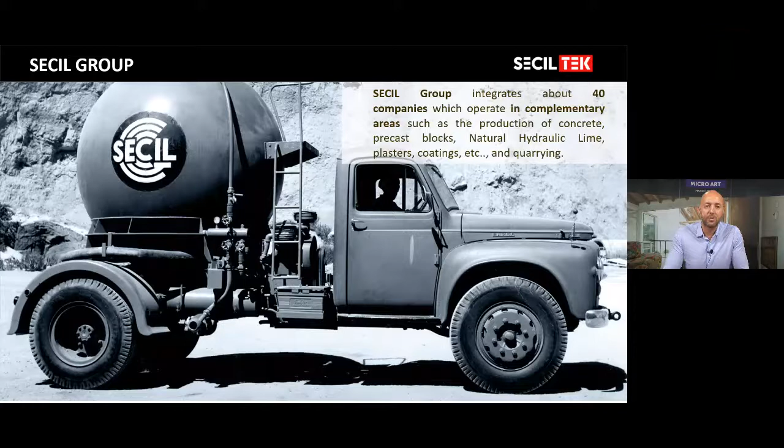Okay, very well. So proceeding, just a quick introduction in terms of the SECIL Group, which is the group where SECILTEK belongs. SECIL Group is a leading group in Portugal for cement production that was founded in 1930. The group also integrates around 40 companies which operate in different complementary areas, such as concrete precast blocks production, natural hydraulic lime, mortars, coatings, all sorts of mortars, and of course also the exploration of quarries, so the quarrying.

Internationally, the SECIL Group is present in several countries with production of cement, mainly Tunisia, Lebanon, Brazil, and Angola. And as I told you, one of the companies within the group is SECILTEK.

SECILTEK is a company that will achieve 130 years next year. It was founded in 1891, mainly with the production of lime and now natural hydraulic lime, but also due to the investigation and development and investment along the years, we have introduced a full range of products that go from tile adhesives to waterproofing, renders, concrete, premixed concrete, micro cement, screeds, rehabilitation mortars, etc. So it's a wide, complete range that can be consulted through our website, seciltek.com.

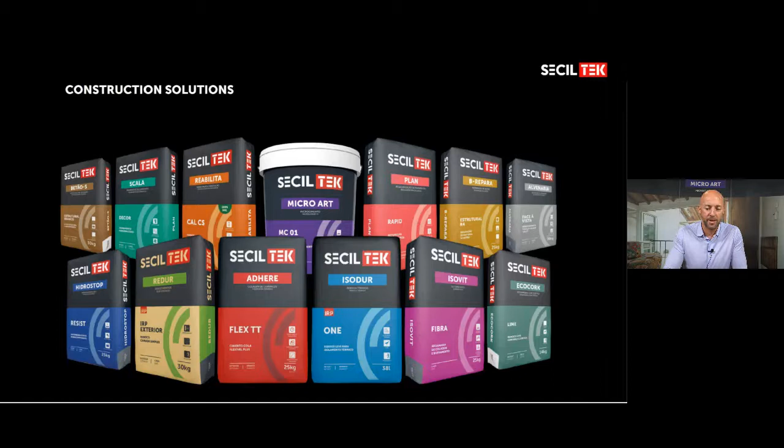As I told you, we are one of the oldest and few companies worldwide still producing natural hydraulic lime, which is a premium binder for rehabilitation mortars and also for new sustainable construction, together with some of our systems based on thermal insulation.

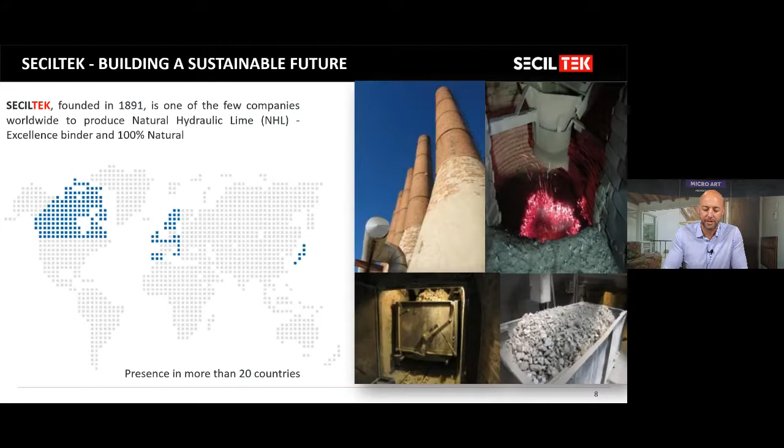Okay, so to start on the MICROART subject. MICROART is a decorative microcement coating. It looks a little bit like what's called béton ciré, or pretty close to what's very traditional in terms of Venetian stucco or tadelakt. But in terms of application, performance, durability and resistance, it's quite different because we can use it also in floors, not only in walls.

I will focus my presentation on the main characteristics of the system: what it is, what type of substrates, what products are involved, the field of application, the application method, which is very important and the focus of this presentation, and some references. In the end, to consolidate all the knowledge, we will have a step-by-step application video that we will try to make available at the end of this presentation. I think it will work very well to consolidate the knowledge I will try to transmit today.

So in terms of general characteristics, what is the MICROART system, what is the microcement? It's mainly defined by a thin layer. It's a decorative coating based on a thin layer that can be applied on walls and floors for pedestrian traffic, okay? We are talking about areas with only pedestrian traffic. Usually the total thickness of application is between 3 to 5 millimeters, which makes this system very good for renovation and rehabilitation purposes. We're not increasing a lot of thickness in the walls or floors when you want to renovate an old coating. It's a continuous coating, without any joints, which is also very well seen aesthetically. So, ideal for renovation due to the low thickness and ease of application on a wide variety of substrates.

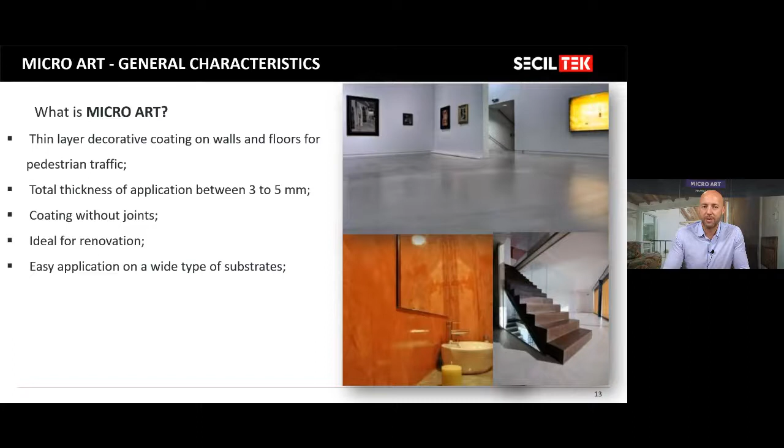Due to the characteristics of the Microcimento or MICROART mortars, we can apply it to almost all types of substrates, even substrates without any absorption or porosity, which is very interesting. It's also available in different colors and different finishes, which I will show you later.

Applied by specialized teams. As I like to say, a good solution, a good system, is only a good system if it's well applied. It can immediately turn into a bad or low performance system if not applied according to the rules or by certified, specialized teams. That's why we are here, to share our knowledge and give useful information to companies or people who will install this system.

It's a system composed of several products with high profitability and durability. It's important to know them all, how to apply them, and if everything is done well, we're looking at a very durable solution with interesting profitability for the people who apply it. Starting from the beginning, we have the MICROART AD21, which is a product suitable for substrate preparation.

As I told you earlier, MICROART mortars are characterized by high adhesion, so usually you don't need a primer to promote good adhesion. You need a primer to protect the substrate, usually for high porosity or heterogeneous substrates, where you have bits and pieces of paint, residual paint, or different types of substrate in connection. Ideally you would regulate the absorption of the substrate to promote an even drying process for the MICROART mortars. So this is the AD21.

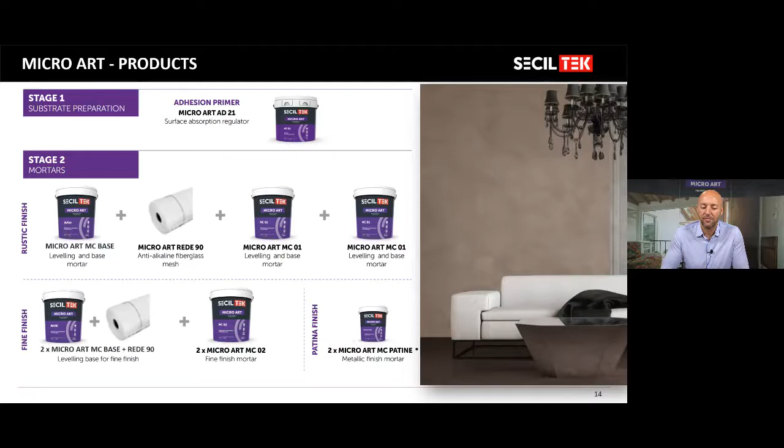After the application of the MC02, if by any chance you're going for a metallic look, we now have a patine finish which can simulate gold, silver, or bronze, called the MicroArt MC Patine. We will have a video at the end showing the application of this new finish that we now have available.

In terms of stage 3, which is the surface protection, this will be the product or system that influences the durability and performance of the system. For example, when thinking about kitchens, or wet areas like toilets and bathrooms, this is very important to focus on. So we have several types of surface protection.

We have acrylic varnishes, composed of an acrylic sealant, with the possibility of going for a satin or glossy look, which is the AD45 or AD46. Or for more demanding areas, for example like kitchens or bathrooms, we have a polyurethane varnish.

This will be a varnish that will seal completely the surface and will promote some increased resistance to water absorption. Here we also need a polyurethane sealant, like a primer, and then MicroArt AD50, which is a 2-component polyurethane varnish.

In terms of maintenance, we have an acrylic wax. This wax is a traditional wax that you would use for a traditional floor, for wood floor, or for a ceramic floor, traditional floor, that can be used to maintain the MicroArt system. We will show how to apply it, but it's very easy to apply. It's like a maintenance procedure that you usually do when using the acrylic varnishes.

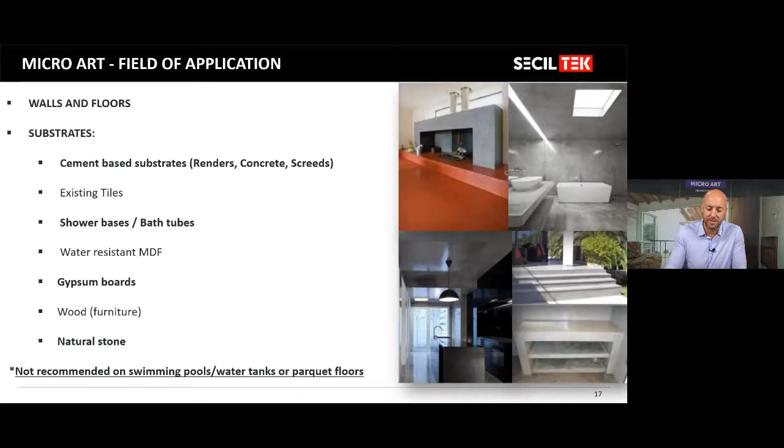We do not recommend the use of the MicroArt system on swimming pools, water tanks, or even parquet floors. Of course, there are some people that would like to have a micro cement swimming pool. We would say, okay, it's usually at the responsibility of the person. When we say we don't recommend it, it's because our concerns are the durability of the system. In constant contact with water, there could be some issues in terms of performance of the system itself. So we don't really recommend it.

In terms of the necessary equipment, for the MicroArt system, it's important to have the right equipment in order to promote good application between layers, but also to prevent pathologies in the future, like protection equipment for foot, to walk on top of the MicroArt system, equipment to clean and vacuum between layers, and also all the tools necessary to protect and promote a good application.

For example, the trowels, the electric mixers, iron sandpapers, we will talk about the grain size, vacuum cleaners, the paint rolls, which are usually short-haired paint rolls, gloves and dust mask for your protection. As application procedures, also the uniforms and clean shoes like slippers, and the tapes for protecting the windows, connection with windows, and plastic sheets.

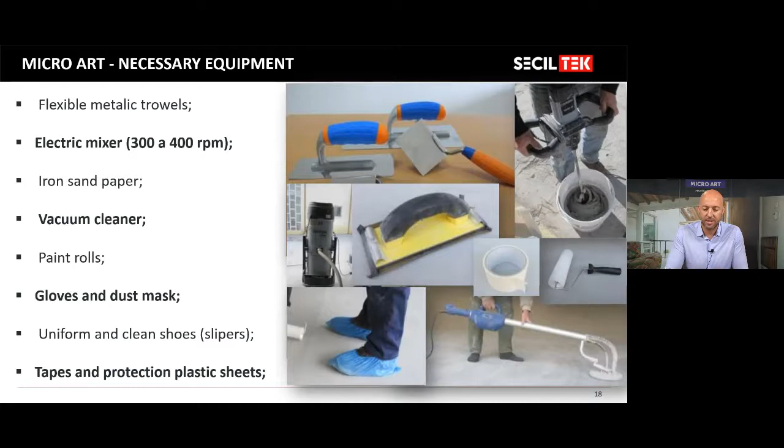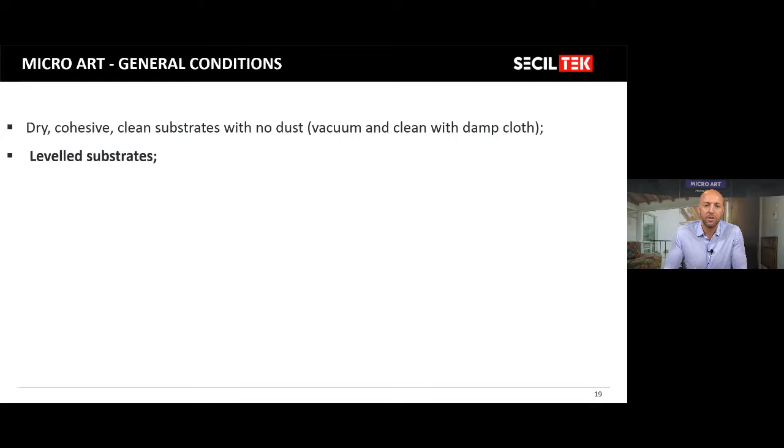MicroArt by definition is a very thin layer system. So if the substrate is not level, you will either consume a lot of mortar or you will notice those unevenness on the substrate. As I told you, the MicroArt thickness is between 3 to 5 millimeters.

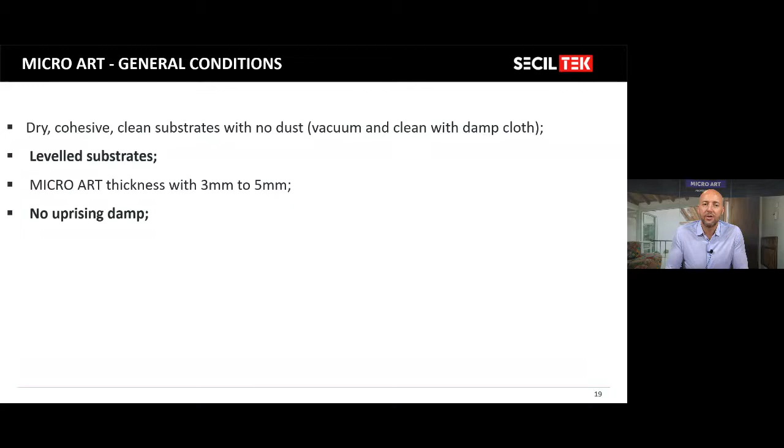It's important that there shouldn't be any rising damp issues. So if it's a ground floor, you should implement solutions and systems that will prevent rising damp from getting trapped between the MicroArt and the varnish or the polyurethane varnish that you are going to apply. Ideally treat it, let the floor dry completely, promote the drying process with mechanical equipment, for example, and only after that, when you have just a residual moisture content, should you apply the MicroArt system.

In terms of shower bases, by definition, MicroArt is not a waterproofing layer. It's a system that has a good resistance to water absorption, but in terms of shower bases, you should promote a correct waterproofing. For that, you can check our Hidrostop range for the cement-based mortars for wet areas and shower bases.

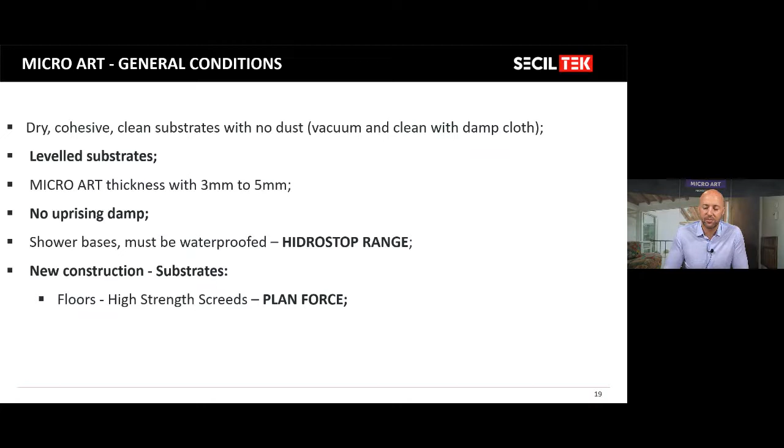In terms of new construction, we recommend substrates that have a good resistance, resistance to pull or adhesion between 1.5 megapascal. In case of floors, we recommend the Plan Force, which is a high-strength screed, or in walls, the use of a high-strength render, ideally Redur Max.

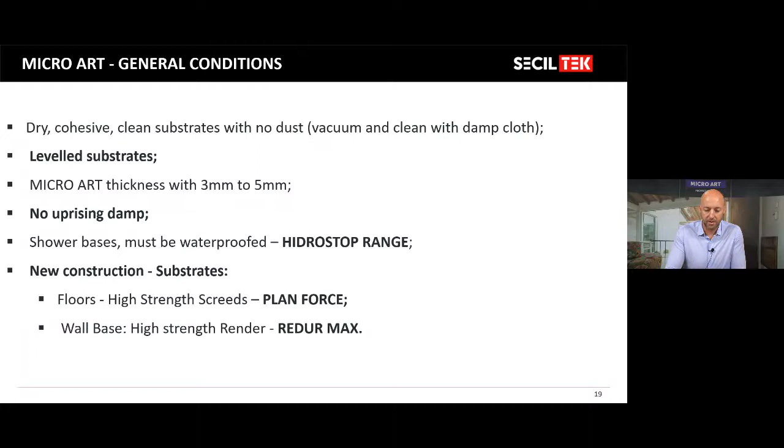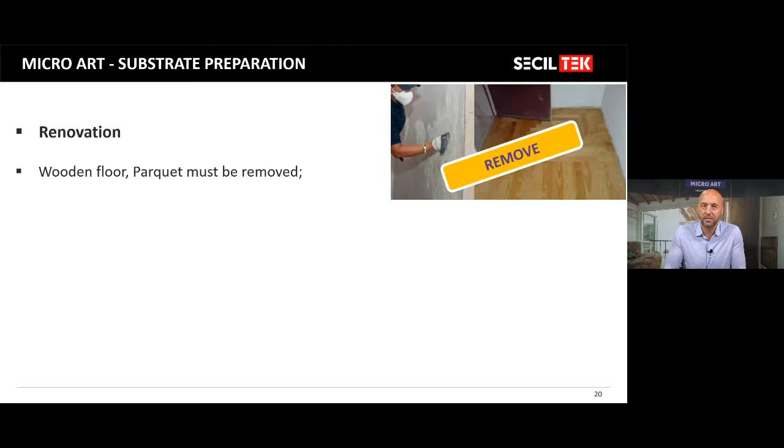In terms of renovation, if by any chance we're looking at wooden floors or parquets, they must be removed. Also, cracked surfaces or non-adhesion particles must be repaired, either with high-strength render, or in case of floors, with a high-strength screed. You should remove existing paints or varnishes.

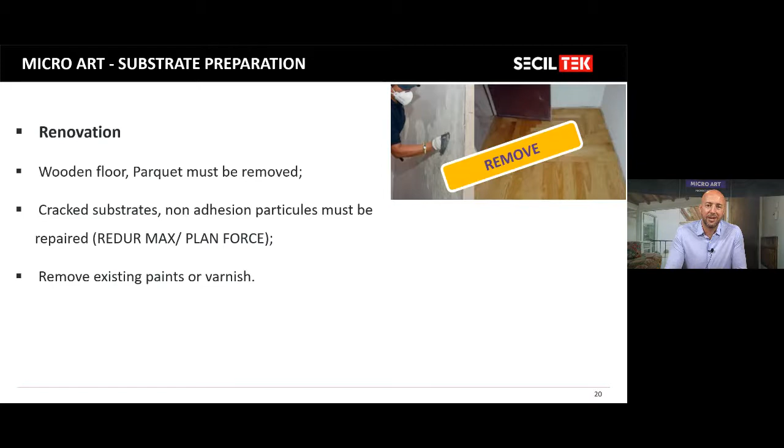If by any chance the existing paint is very well in connection, the adhesion is very, very good and it's difficult to remove, this could be a good substrate for the application. But ideally, any paint that doesn't have good adhesion, you should remove it.

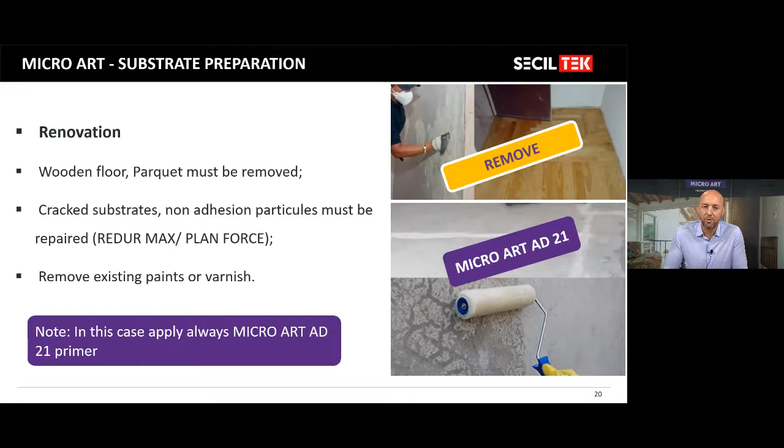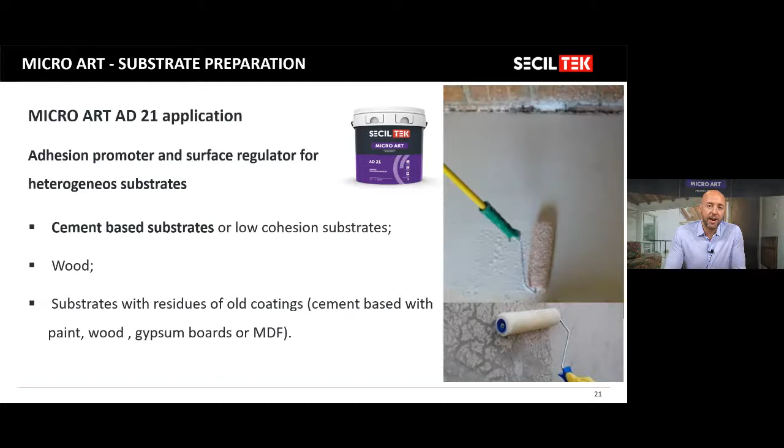In these cases, because we are talking about heterogeneous substrates, you should always apply the MICROART AD21 primer and regulator. This is just an adhesion promoter for cement-based substrates and wood, or substrates with residues of old coatings, so heterogeneous substrates, and substrates that have high porosity. For those types of substrates, AD21 is recommended.

In terms of the application itself, we will see in the end a video that will clarify all the steps, but I give you here a preview of the products in terms of the mortars application.

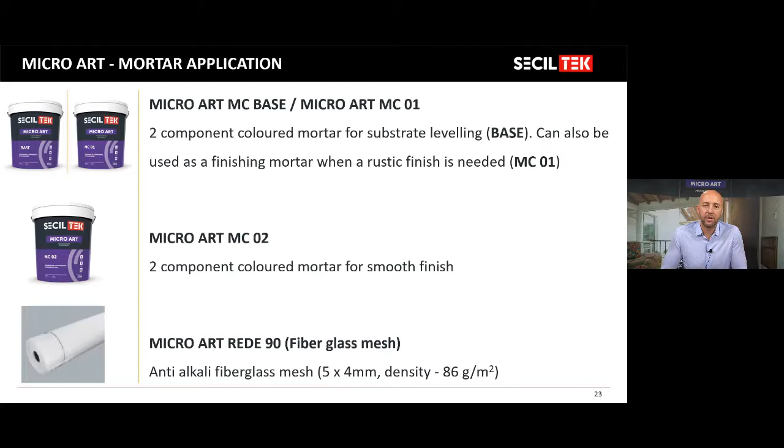We have, as I told you, MC base, which works as a base leveling product for all sorts of finishes. If you're going for a rustic finish, then MC01, which is also leveling mortar and finishing mortar for the rustic finish, or you go for MC02, which is the fine two-component mortar for the smooth finish. The MICROART Mesh 90, always use it when you're applying the system on floors or over tiles.

Another thing I would like to focus on, because this information at this point is probably a lot, but it's present in our brochure, you can study it after. I would focus on the smooth or fine finishing, and I would like to make clear the difference between the coats you have to apply in walls, which is usually one coat of MC01 or MC base, and then two coats of MC02.

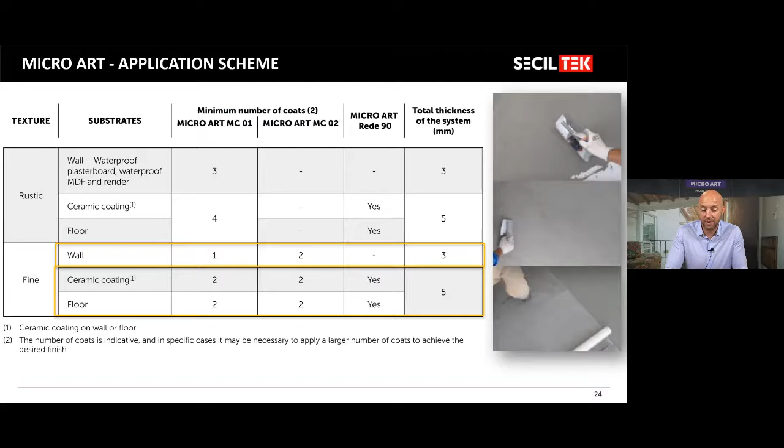This will give you a thickness of around 3 mil. But if you're working on top of ceramic coats, ceramic or tiles, or even in floors, you have 2 coats of MC base, and then 2 more coats of MC02. This will give you the total thickness around 5 mil. Just wanted to focus on these different thicknesses, so you can check what needs to be done in one case and the other.

In terms of the mortar preparation, we will also check it on the video, but the mortars, the MC base, 01 and 02, are 2 components. Component A is a powder, which is white, and then the liquid is the colorant that will give you the color in the end. So you just need to mix very well component B, the liquid, before joining it with component A, and then mixing both with an electric mixer, more or less around 2 minutes, until you obtain a homogeneous paste.

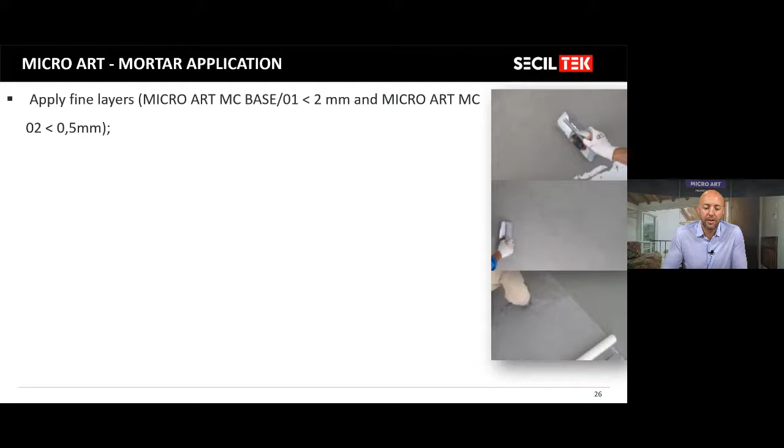We should apply this system always in fine layers, ideally the 01 or base below 2 millimeter thickness, and then the MC02, because it's a finer product, below 0.5 millimeter. In floors or over tiles, we always need the mesh and 2 layers of MC01 or MC base.

We should work every layer as if it were the last. This is very important to obtain a perfect system. So what does this mean? This means that you have to sand between layers, then vacuum and clean very well before you apply the second layer. And then the waiting period, which is around 3 hours between layers in terms of application.

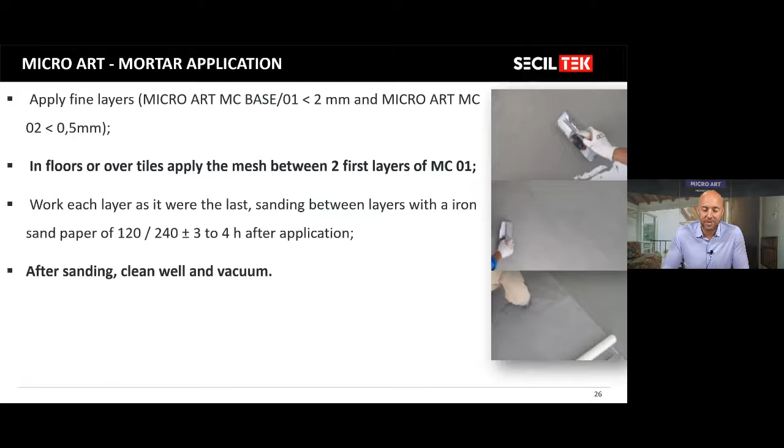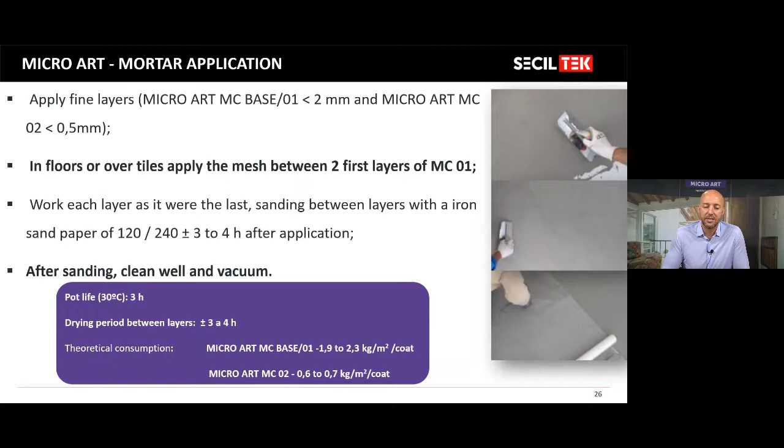After sanding, as I told you, clean the surface very well, ideally vacuum it and then wipe it. Also very important is the pot life of the product: at 30 degrees centigrade, it's around 3 hours. And the drying period between layers, as I told you, is 3 hours more or less. Also the theoretical consumption is here, but you can check it on our brochure.

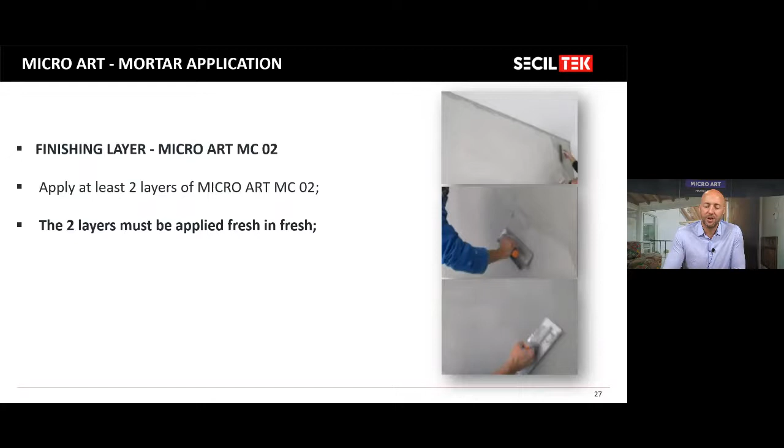In terms of the finishing layer, the MC02, the fine one, whether we're talking about floors or walls, we recommend the application of at least 2 layers. These layers must be applied fresh in fresh. Why? Because this is a very thin layer, we don't have many concerns in terms of the drying process. So the drying process happens very fast. These are very thin layers, so you can apply fresh on fresh, these 2 layers.

It's very important, and here we talked about the protection equipment.

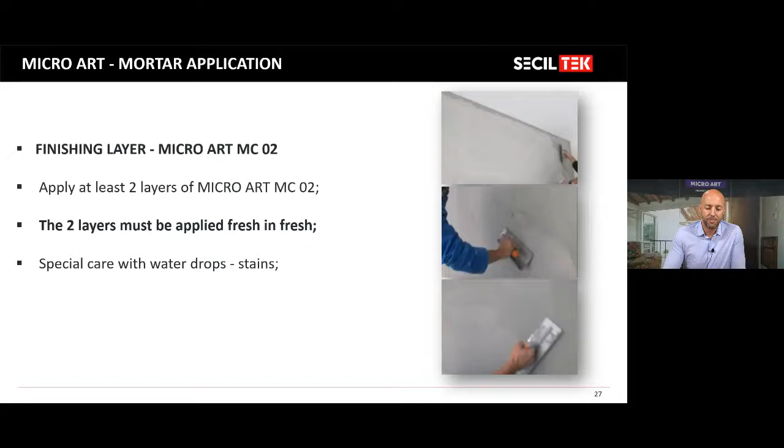In order to prevent stains, which can happen during application due to sweat stains or water drops, it's very important to be careful in terms of the procedure. Sand it, clean it very well, and vacuum between layers.

In terms of surface protectors, as I showed before, we have 2 types: a polyurethane-based protection, which is for more demanding situations with more resistance to abrasion and water absorption, and the acrylic protection, which can give you a glossy or satin finish. Then for maintenance, there's the traditional wax.

In terms of the polyurethane varnish protection, we will also see it in the video, but it's a 2-component polyurethane varnish. You just mix component A with component B. It gives you a satin look, not a glossy finish. I think the satin look is mostly preferred by everyone. It's high strength, water resistant and chemical resistant.

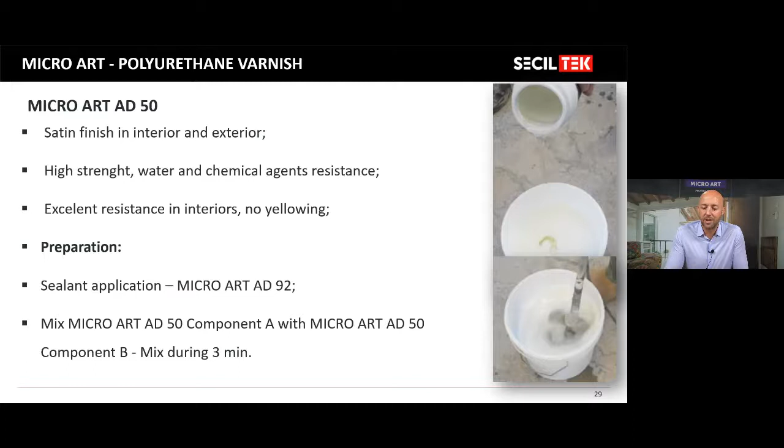The varnish has excellent resistance in terms of yellowing. We're talking about yellowing because we have windows and all sorts of natural light coming into the house, and it's important to have a product that will not turn yellow in contact with UV lighting. In terms of preparation, it's mixing component A with component B for 3 minutes.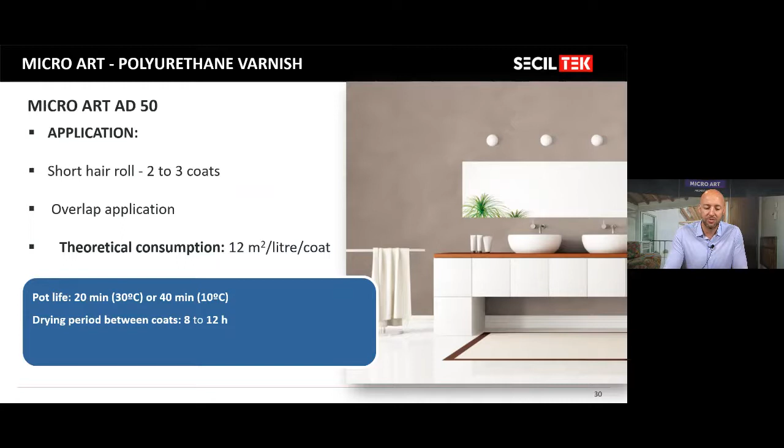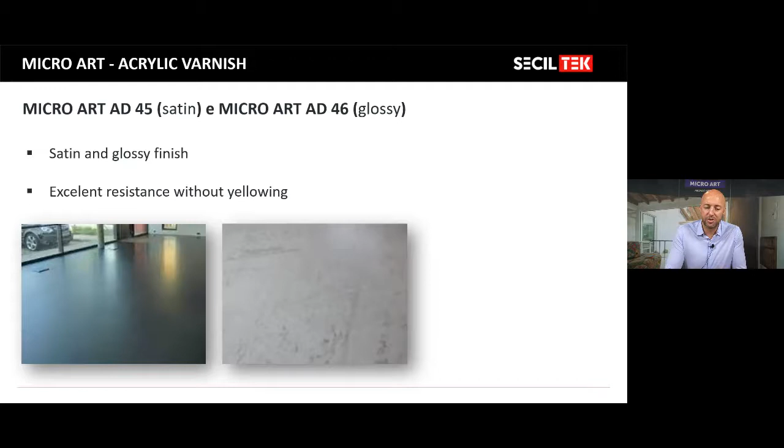The drying period between coats is around 8 to 12 hours. MICRO ART AD 45, the satin finish, or MICRO ART AD 46, the glossy finish, have excellent resistance without yellowing also. They give you the traditional look of a varnish, and they always need the application of MICRO ART AD 91 first, which is an acrylic sealant applied before the varnish itself. This sealant is used for filling the pores and to promote adhesion, increasing the varnish durability and surface coverage.

Apply it also with a short hair roll, then sandpaper and clean it after the product dries. The duration of the drying process is roughly 3 hours, and then you apply the coats of the acrylic varnish.

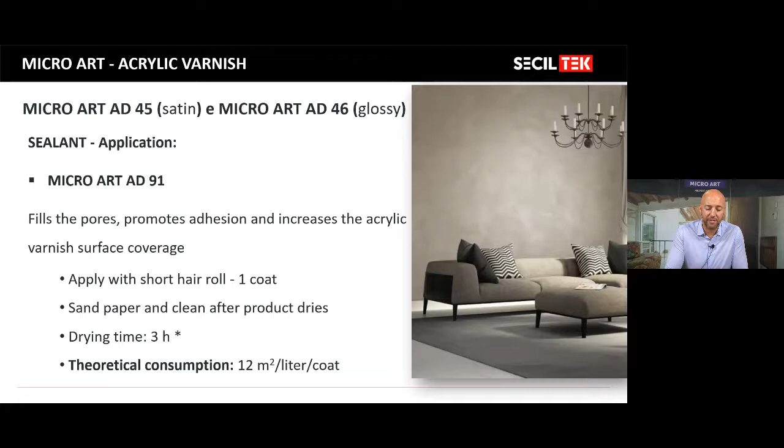In terms of the application of the acrylic varnishes, after the sealant dries, we mix the product, which is one component, and then apply it in at least 2 coats with a short-haired roll. Also here, overlap the application, and the drying period between coats is around 3 hours also.

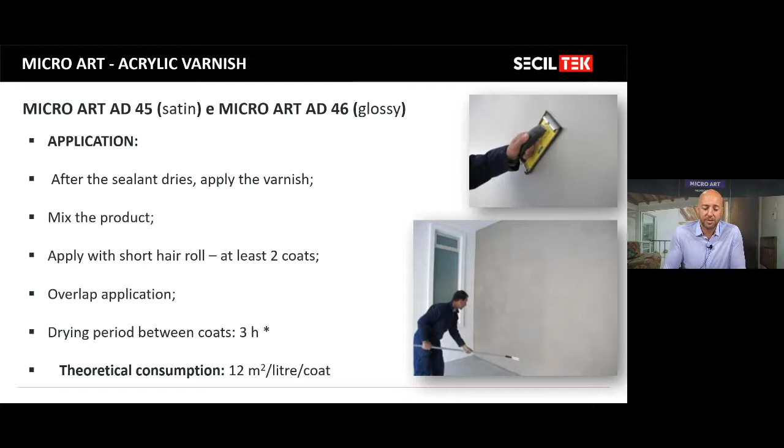MICRO ART AD 47, as I told you, is the traditional wax finish. It has a matte look and is used as a protector or maintenance. In terms of application, very simple, just mixing it and applying it with a cloth, like you see in the picture, in at least 2 coats. This depends on the use of the floor.

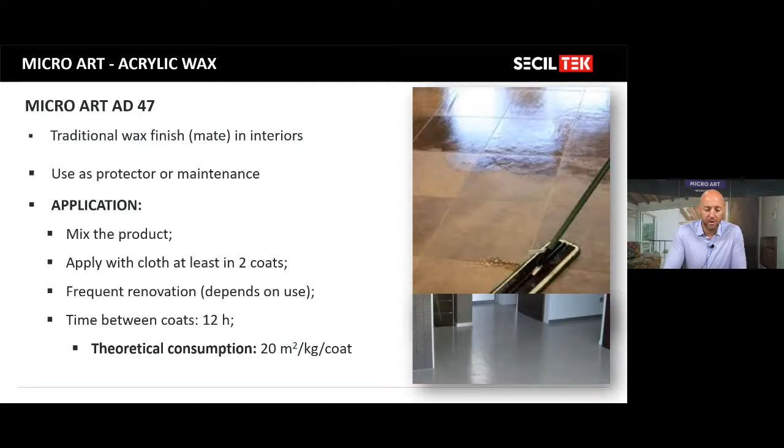If it's a high traffic floor, ideally you should do this maintenance application more often. If it's an area where you don't have much foot traffic, the maintenance would be much more spaced in time, of course. The time between coats is around 12 hours.

The best way to check if your floor needs some maintenance in terms of the varnish application would be like in the picture: if you drop some droplets of water on the floor, in the 2 pictures above you see there is no absorption, the droplets just stand there, but in the ones below you see the floor starting to absorb the water. This means that maybe you should think about renewing the application of the maintenance wax.

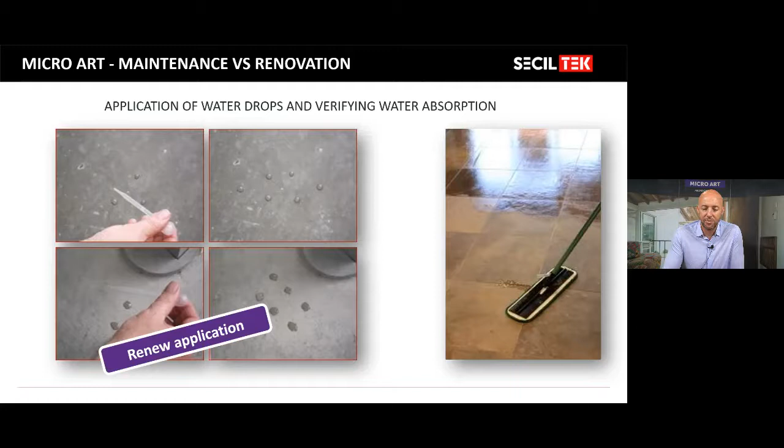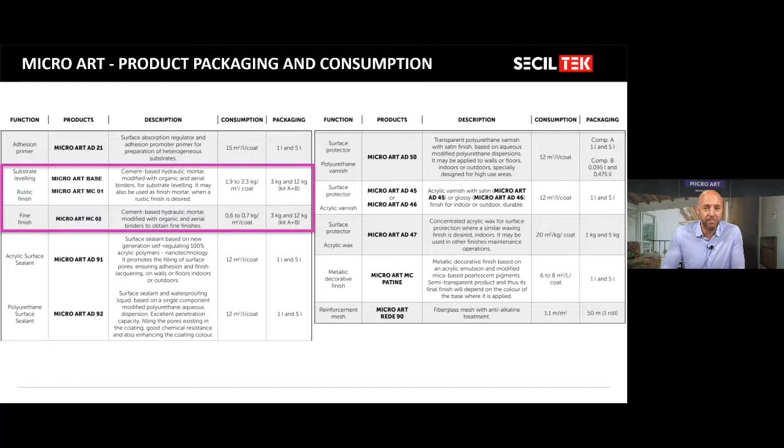Also here, we have a description of the different types of products, their application, consumption, and packaging. All this information for the complete products of the system is available in our MICRO ART brochure, which you can consult anytime. It gives a step-by-step application guide and all the details I'm focusing on here.

In terms of color range, we have 15 colors available. These are the main colors we supply, going from whites to a very wide range of grays, and then some specific colors like brown, yellow, and more orange or ochre tones. It really depends on what you're looking at in terms of floors or walls.

And of course, we have a new type of finish, the patine, which we'll also show in the video, that together with certain colors can give you a gold, silver, or bronze look. I think this is a trend now and very interesting to use.

In terms of recommendations, as I said in the beginning, the performance and good behavior of this system depends on following certain rules. The first and one of the most important is looking at the temperature of the air and substrate temperature. You shouldn't apply this system if these temperatures are below 10 degrees or above 30 degrees. This is very important.

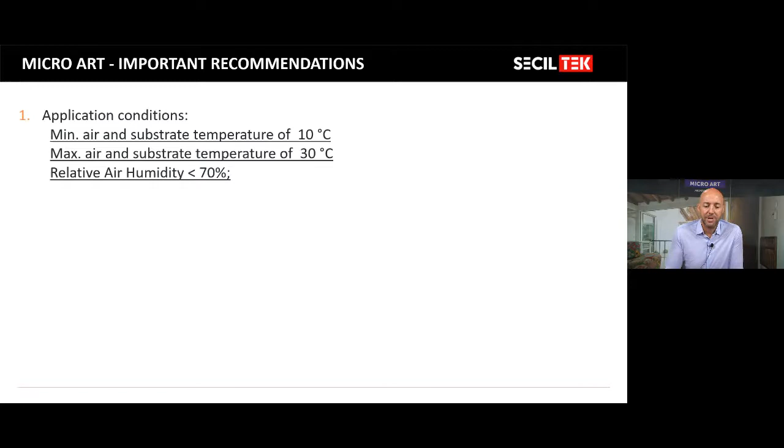Also, the relative air humidity shouldn't be below... well, above 70%. If this happens, you'll have problems with the drying process of the material. If by any chance you're applying under these conditions, you should promote mechanical control of the interior temperature, substrate temperature, and air humidity. If not, you should wait for better conditions.

If the products are applied at low temperature and high relative air humidity, the drying times will be extended. So a correction here: it's above 70%, which is important. There should be a waiting period before application of the protectors—at least 24 hours between the application of the mortars and starting the protection, like acrylic or polyurethane.

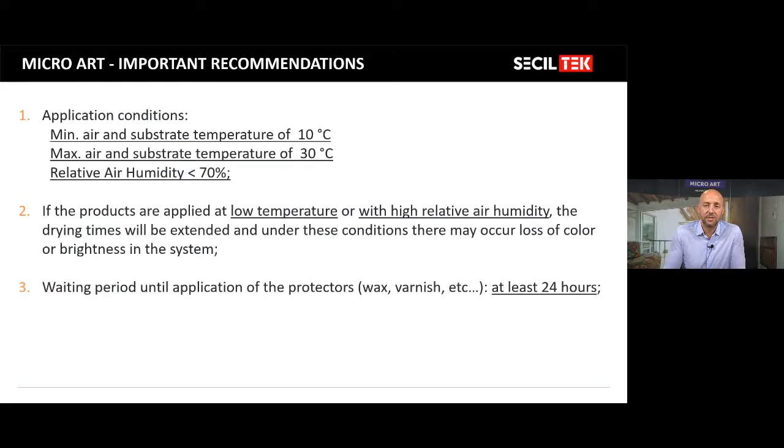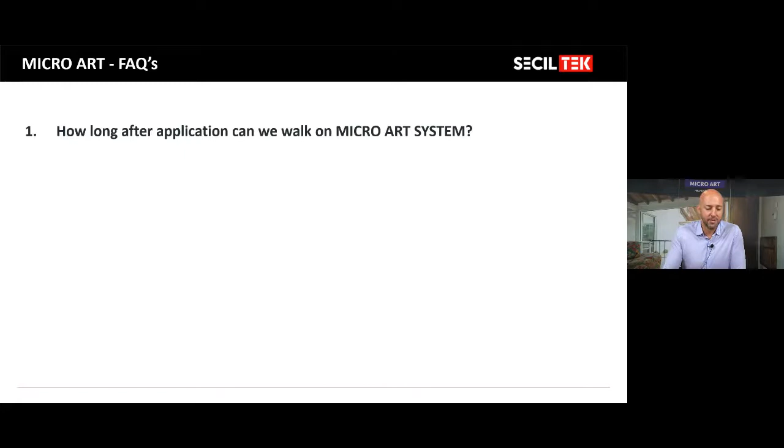Also, we have some frequently asked questions I'll bring here to make it easier. How long after the application can we walk on MICRO ART systems? Since this type of mortar is based on thin layers, meaning quick drying, we would say that between 3 to 4 days you can walk on it.

Of course, we are talking about foot traffic, but like every cement-based mortar, the complete curing or drying process occurs after 28 days. But after 3 or 4 days, you can walk on it.

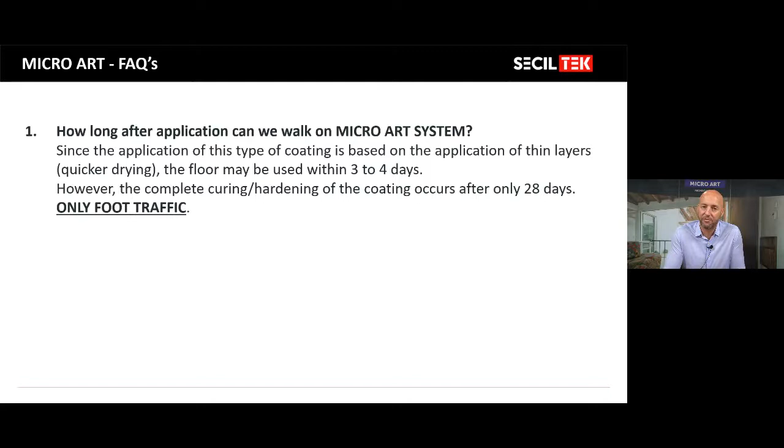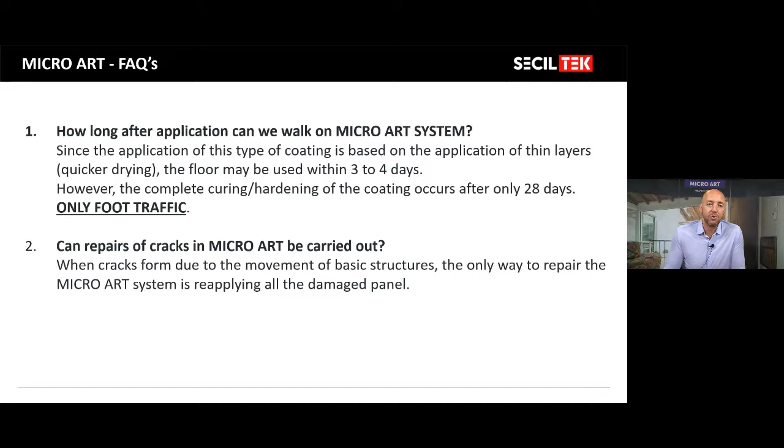In terms of cracks, if you have any cracks on the substrate after application on walls and floors, could we repair it? We can, but we cannot repair it punctually. We need to repair the entire area or panel because otherwise you will notice the repairs, so ideally you should redo the entire panel on the wall or floor.

Also, how do I make an application on substrates with pre-existing moisture? Even though MICRO ART is a water-resistant coating, it doesn't work as a waterproofing layer. We need the substrate to be completely dry. We should correct any rising damp, or if there will be frequent contact with water, we should properly waterproof the area before applying the MICRO ART system.

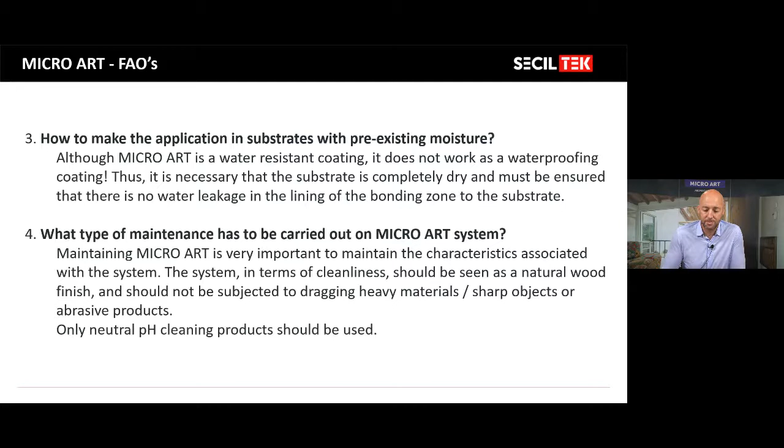What type of maintenance has to be carried out on the MICRO ART system? Maintaining it is very important, as I mentioned, and depends on the use and frequency of use. In terms of cleaning, it should be treated like a natural wood floor. You should avoid dragging heavy material or using sharp objects or abrasive products on the system. We recommend only neutral pH products for cleaning MICRO ART.

So before we go to the Q&A, I would like to show you a step-by-step application video for the MICRO ART system. I'll be talking a bit between the video itself, clarifying some aspects of the application. The video is roughly 9 minutes, so bear with me. Afterward, we'll have time for questions that I believe have come up during my presentation.

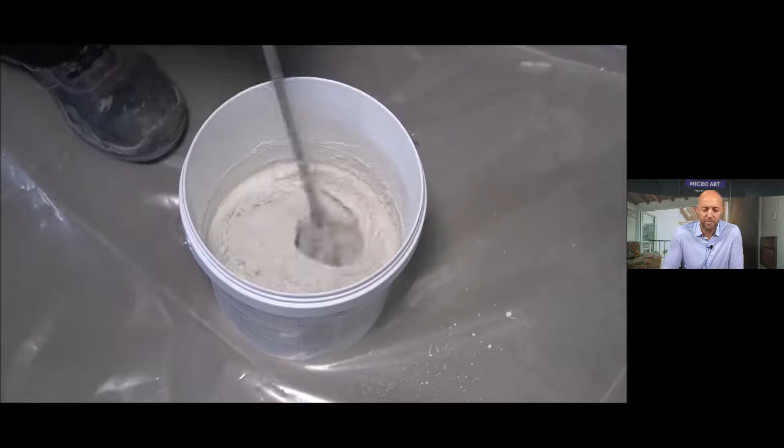The mixing process is like you see on the movie. You mix the liquid very well before joining it with the powder, and then mix it with an electric mixer until you obtain a homogeneous paste.

In terms of application, we recommend a 3 mil notch trowel for the application of the first layer with the mesh. This is very important because you control not only the thickness of application, so you're controlling how much product you consume, but you also create a good substrate for the mesh application.

The mesh usually doesn't need to be squeezed onto the layer. It really needs to be put just on top of the layer without doing a lot of pressure. This is an 86 gram per square meter, 4x4 mesh for this type of application.

Then here you have a curing period of 6 hours, and then we can proceed to the second layer of MC01 or base.

We are here simulating the application of a floor or tiled area. If it was on a wall, the mesh would not be necessary. But here we are demonstrating the more demanding application.

So after the application of the second coat, we wait no less than 6 hours, and then we start the preparation of the substrate. Here we use fine sandpaper with 120 grit, and then we vacuum and clean very well before we move on to the MC02, which is the fine finishing product.

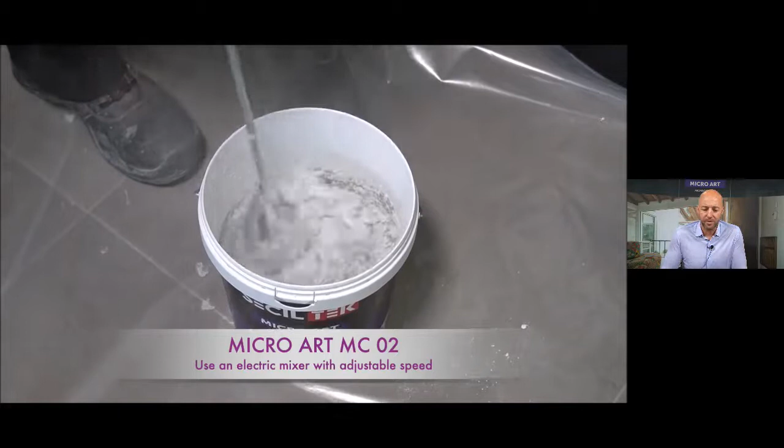So this is an electric mixer you use to mix. The speed should be regular, and it should be possible to regulate in terms of frequency.

So after the mixing of the product, you have the application of the MC02, which is done using a metallic trowel. I believe we lost a bit of the feed here, but I can tell you this was applied with a small metallic trowel with round edges.

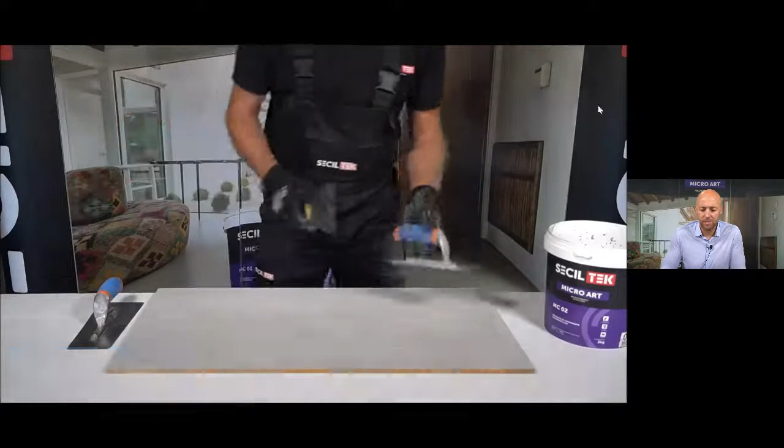After the application and drying, around three hours, you should vacuum and clean, then apply the second layer. Not 3 hours, sorry, the MC02 you can apply fresh on fresh, so the drying process is quite fast.

So here we are applying the second layer of the MC02 after the first was sanded and vacuumed. As I told you, here we use a relatively small trowel with round edges in order to facilitate the application, and here you can see the application of the second coat of MC02.

So here the MC02 is applied in different directions. This really depends on the person applying it, because it's in this coat that you're going to give it the béton ciré, the burnt look, let's call it. So as many passages as you do, the more burned effect you create. As it says here, this application stage is really a creative stage.

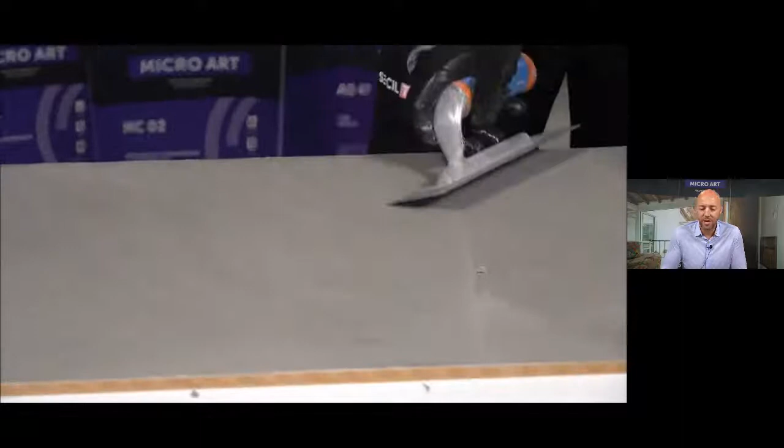You can even take little pieces of additional mortar and apply it on top to create more shades in the final look. This really depends on the expectations of the customer, if he wants a more homogeneous look or a more heterogeneous, shaded look. So as you see here, small extra portions of the mortar will give it new different effects or burned shades.

Okay, then we have the final layer of the MICRO ART fine finish.

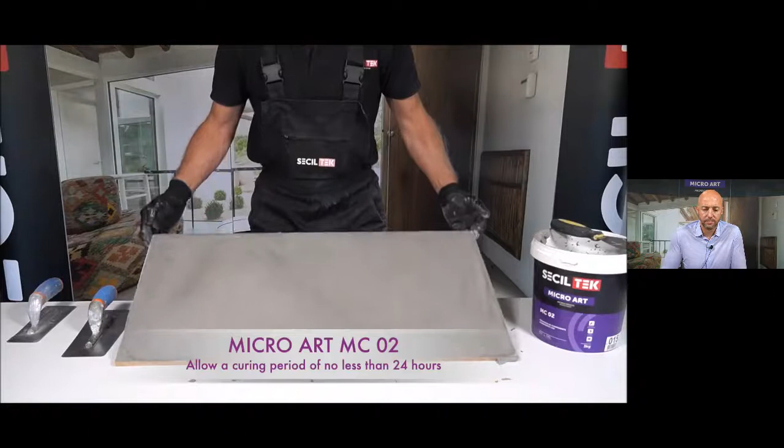When you finish the mortars, you should wait at least 24 hours before moving on to the surface protection products. So here you have to sand it also with a fine sandpaper and then clean it very well and wipe the dust. Depending on the type of protection you go for, either polyurethane or acrylic, you should use the sealant.

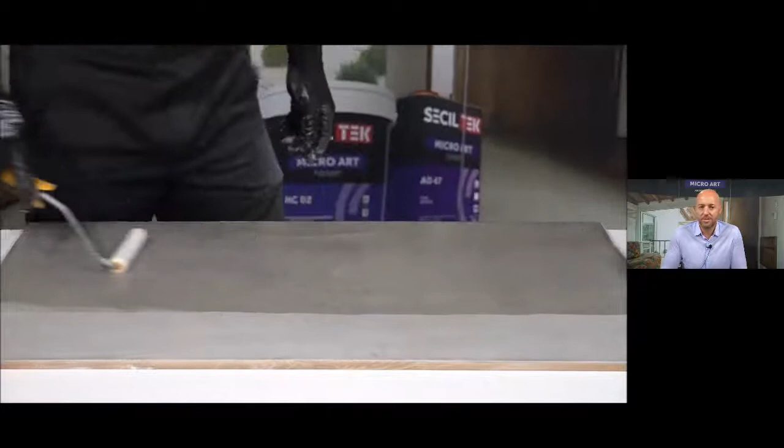For the acrylic varnishes, we use the AD91, which is the primer for these varnishes. The application is very easy, just one coat with a short roll that you apply like you see in the video. It's very easy to notice where you already passed this product, because you get a darker color, so it's easy to not miss spots.

After the application of AD91, you should have a period of 3 hours in order to promote complete drying.

Then you would go for the acrylic varnish. Here we are applying the AD45, which is the satin varnish. We could go for the AD46, which is the gloss. The application process is exactly the same. You should apply at least 2 coats of the varnish to get good coverage and good protection, applied with a short roll, same for the 46 and for the polyurethane.

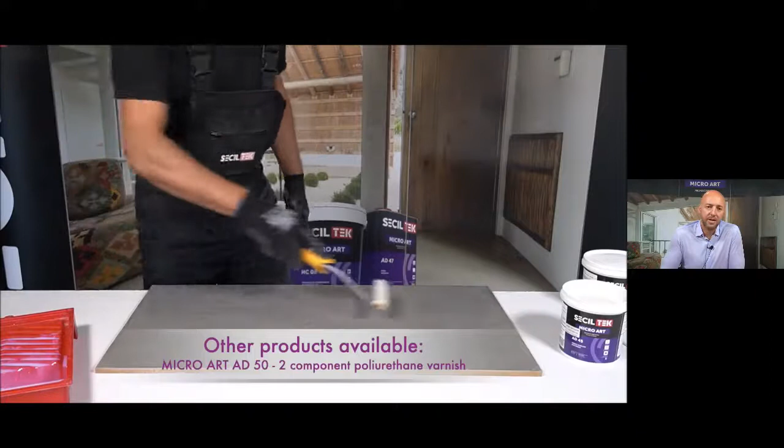The polyurethane varnish would need the AD92, which is also based in polyurethane, and the application would be exactly the same.

In terms of maintenance, as I told you, we will have the AD47, which is the traditional wax, which can be done with a cloth for the application. And here you go, the final look of MICRO ART with the acrylic varnish in terms of finish.

Very quickly, I will just show you the application of the patina, if by any chance the customer would need this solution. The patina will give the MICRO ART system a metallic look, gold, silver, or bronze. You can check the brochure; we have specific colors you should use before applying the patina, either from the dark colors, dark gray, or from the browns, depending on the type of metallic you should use.

Here we're going to see the application of one of the patinas, very quick. The patina is not really a liquid, but it's not a mortar either, so it's like in a pasty form. It's very interesting to see the application.

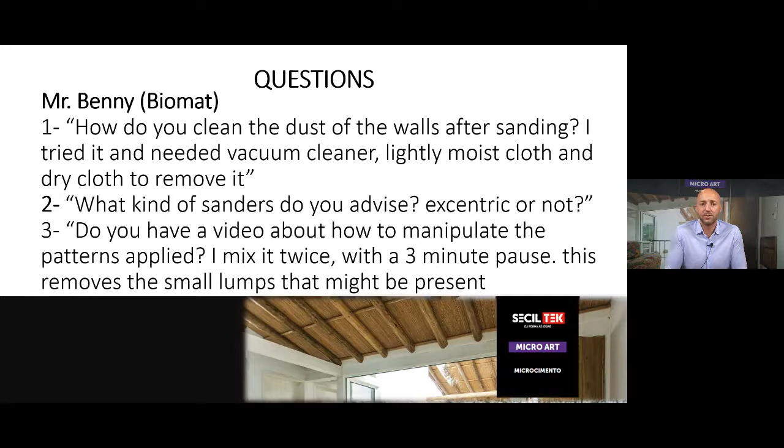Do you have a video about how to manipulate the product once applied? I mix it twice with a 3 minute pause. This removes the small lumps that might be present. I think we showed it in the video too. Mixing the material for 2-3 minutes at a good temperature does the trick. And very important: mix the liquid component before putting it together.

Some more questions, I believe these are the last ones. Do you have a video about how to manipulate it? Oh, this one I already answered.

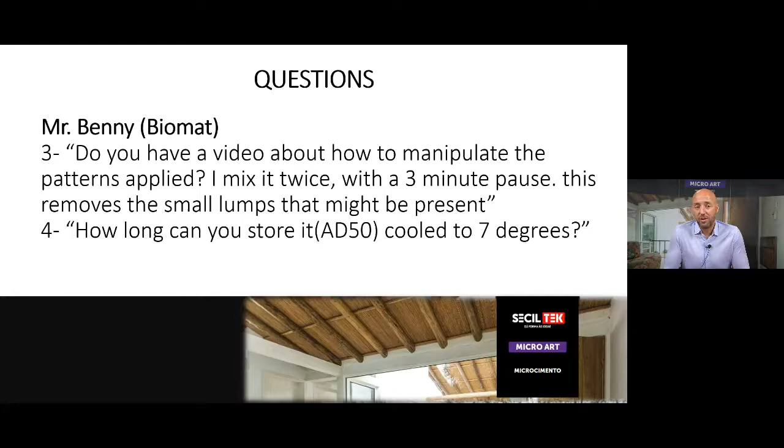How long can you store it? The AD50, cooled to 7 degrees? I'd say storing the AD50 is no problem. The product has a validity of 12 months. At 7 degrees, the AD50's two components are not mixed together. The important issue is when you're going to apply it, you should mix it in good temperature conditions, as I showed in the presentation. Low temperatures and very high temperatures affect performance because they react. This is very important to follow. In terms of storage, I don't have any issues with temperature—temperature really matters when you're going to apply and mix both components.

Finally, is this maintenance only for acrylic, or also for PU varnish? The maintenance is only recommended for the acrylic. If you have PU, it's long-lasting with high durability—you don't need to use the traditional wax.

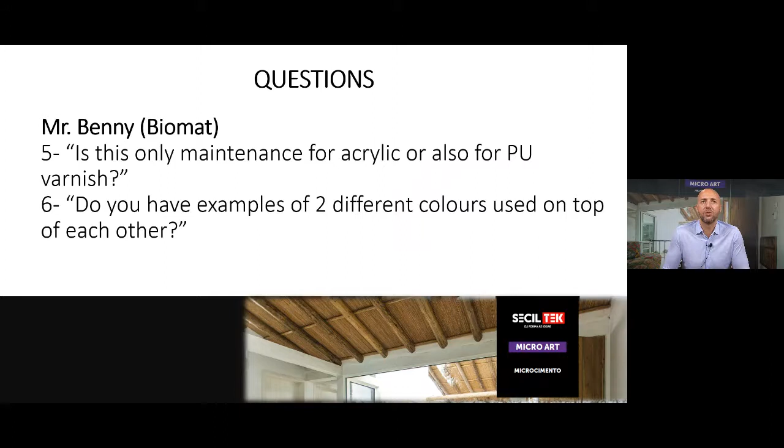Do you have examples of two different colors used on top of each other? I'm not sure I fully understand, but for example the MC02 in any color applied over the MC base, which is white—we don't have any issues there, that's why we chose white as the base. The patines are also applied over colors. I'd say there aren't any concerns with that.

So the last question, correct? Correct. Do you need a mesh on a wooden desk? If we're talking about real wood—massive wood, not wood from IKEA or other furniture suppliers—if it's really wood, I don't see any issues applying directly. Use the primer because wood absorbs, so use the AD21 and then apply the system without the mesh.